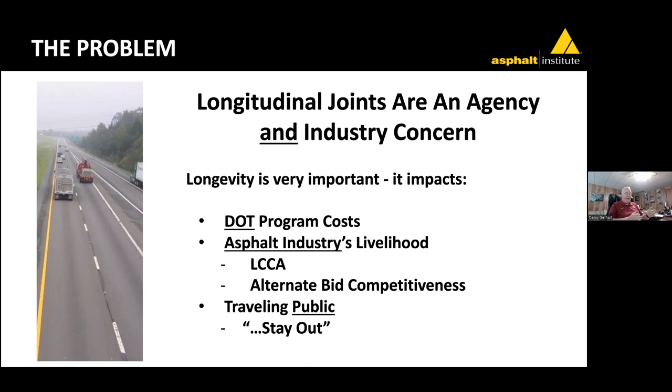Of course, the asphalt industry, it's their livelihood. There's a lot of push around the country about life cycle cost analysis. And if my entire roadway is very capable of lasting 20 years, but my poor joint cuts that in half or more, now that's really going to affect my alternate bid competitiveness. So I think it's in everybody's interest to build good longitudinal joints.

Well, we're going to use some terms this afternoon that we kind of want to get a handle on. I want to make it known that I don't always use exactly the precise term. A lot of times when myself or somebody else in the industry uses the word density, which is really a weight per unit volume, we really intend to be referencing the percent relative compaction. So I might say 94% density, and when I say that, I mean 94% of the maximum theoretical density.

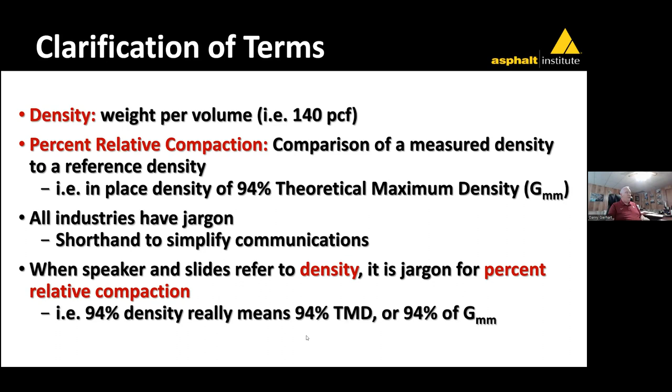So just be aware that I'll be using the term density consistently, but a lot of times I'm going to mean percentage of maximum theoretical. So just so happens the very next slide, though, this density actually means density.

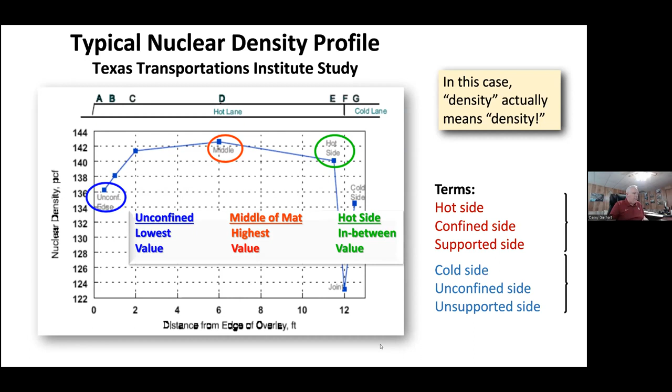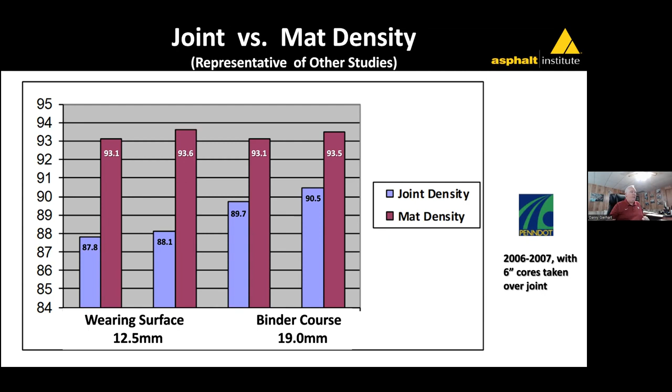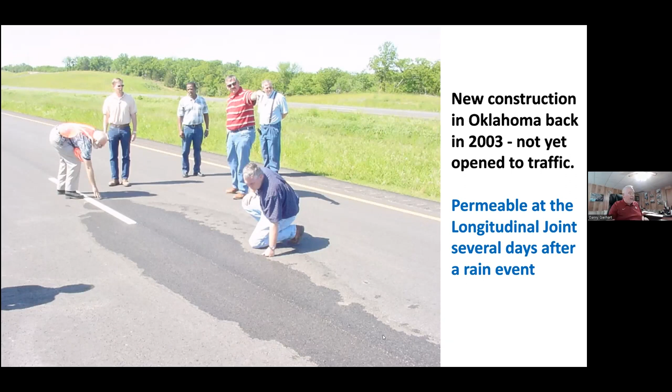This was a picture on a brand new pavement, never open to traffic, and I got called out there because after a rain, you could see that at the joint there was a lot of moisture that hung on for days and days. The issue was that it was very permeable there, because there was low density. So the first thing I asked to do was to see the records of the densities, and station after station I'm seeing 93, 94% density, but that's out in the center of the mat, not at the joint. I'm going to show you later the densities of the cores we cut right next to that joint - pretty shocking. It doesn't even have to be a pavement that's aged a decade to have a failing joint. This one's never been open to traffic and already having some joint issues.

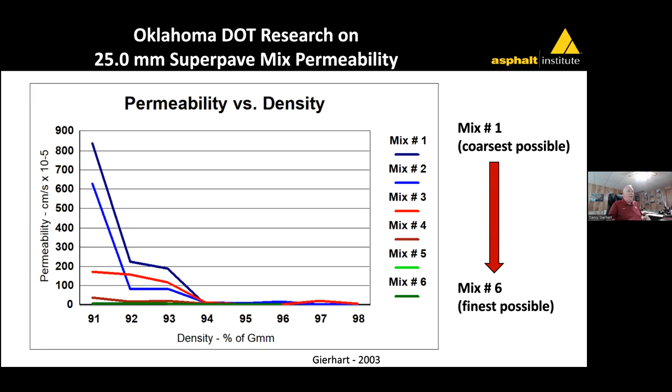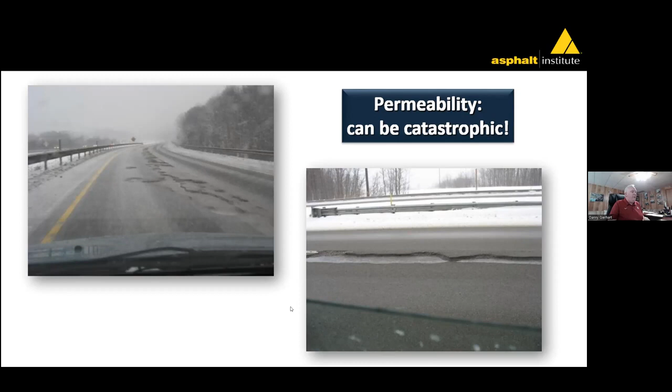So what affects the quality of this longitudinal joint density? What's going to lead or facilitate longitudinal joint problems? Well, it's the way the asphalt specifications are written, the way the asphalt is placed, and the way the asphalt is compacted. So this is both an agency, a contractor, and an inspection issue - everybody's got a part to play in making a good longitudinal joint.

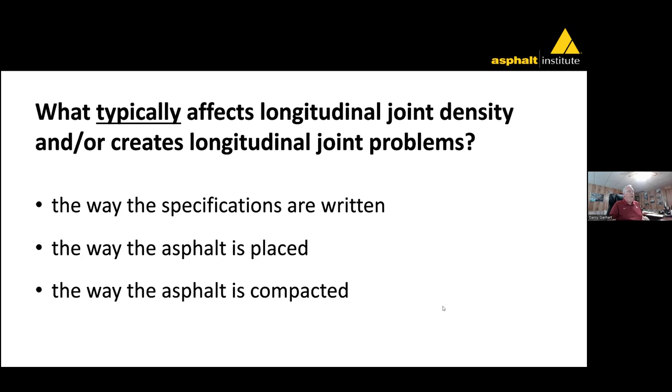So let's talk about the specifications. One of the things I think is really important to good longitudinal joints is a longitudinal joint specification. I really agree with this statement: if you can't measure it, you can't manage it. So we want to have some way to measure that longitudinal joint and compare it against some desired specification so that we can manage the quality of that joint. Otherwise, it will not be paid attention to.

So here in the upper box, what happens if we don't have a longitudinal joint specification? Well, there's high agency risk of joint failure, and the issues that go along with joint failures - those are both safety issues and budget issues for repairs. If there's no spec, there is no incentive for quality. Now that doesn't mean - we've got great contractors in Oklahoma - that doesn't mean they're going to try to do a bad job.

It's just that they don't have any financial incentive to make the best possible joint that they can make. And remember, we're in the low bid system, so a lot of times even the best intentions can't necessarily follow through because we have to compete against other contractors. If we can't get a job, it makes it very difficult to stay alive.

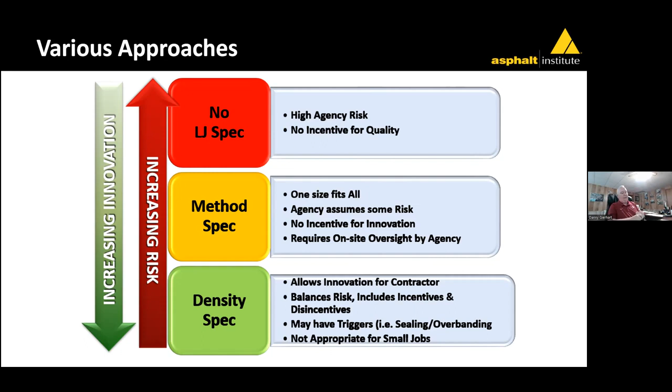We want to pay attention to our city friends that might be using DOT specifications. When we have these high density joint density specifications, those types of specifications aren't really appropriate for neighborhood cul-de-sacs, places where you can't get a nice paving train or compaction train in there to do the work. So it's going to require some judgment to decide where a density spec like what we're talking about is appropriate to be used.

I'm going to see if I can minimize this as well. Pardon me.

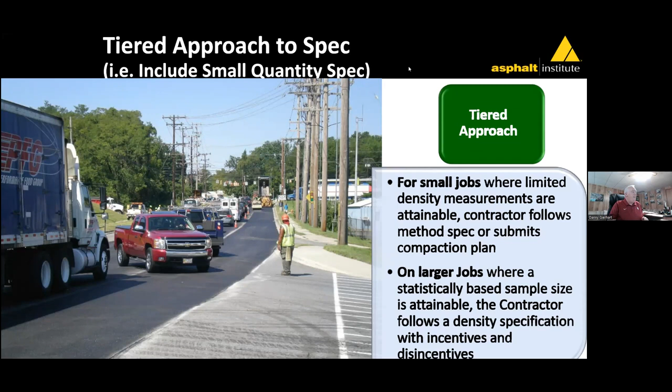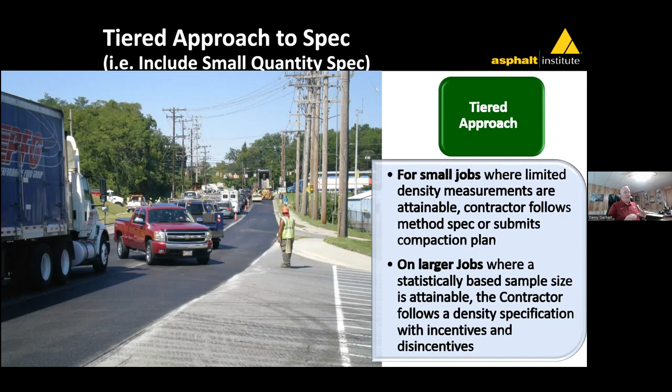We might have some tiered specification. For small jobs, maybe the contractor just follows a method spec or submits some type of a compaction plan that has to be approved - that might be more appropriate for city, county type jobs. And then for a larger interstate job, a state highway system job, or even a very large city collector where you could get statistically based samples, then the contractor would follow this density specification with incentives and disincentives.

Okay. Pardon me, but I'll make sure what slide I'm on. The controls are hiding my titles.

So, joint performance versus joint density. Stacy Williams over at the University of Arkansas has done some research, and their research indicated that when they noticed in the field that they had good joint performance, the joint density was within 97% of the mat density. When they had fair joint performance, the joint density was 93 to 97% of the mat density - and I'm not talking 97% density or 93 to 97% density, that's a percentage of the mat density. Poor joint performance was when the joint density was less than 93% of the mat density.

We have some more research done by Dennis Morian over in Nevada, where they basically had two categories: significantly better joint performance, 12 years or more, when the joint density was 98% of the mat density, and then they tended to get 8 years or less in service quality when the joint density was 95% or less of the mat. So in general, when we're talking about these, I gave those numbers as percentages of the mat density. Let's translate that into percent of GMM.

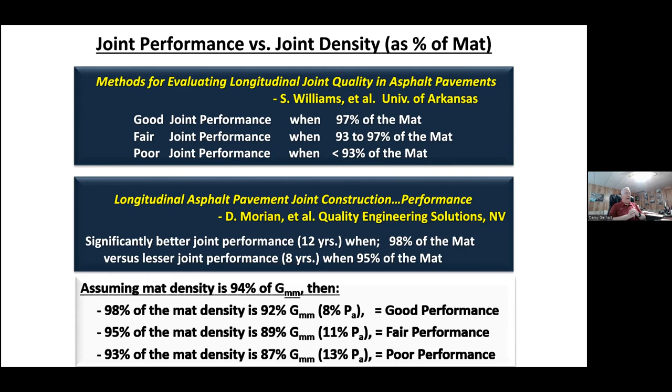We would typically see good performance where we would have 92% or more joint density, 8% air voids or less. We would see fair performance when we're in the range of about 89% of GMM, 89% of the theoretical maximum density, and then poor performance where we're down to 87% density or less.

Asphalt Institute's suggestion for a density spec is to cut cores directly over the visible joint for a butt joint, or in the middle of the wedge for a wedge joint, giving a 50-50 split of material. You'd average the GMM for both lots. The criteria would be greater than or equal to 92% of GMM for the joint density.

That's where the contractor would earn the maximum bonus. Between 90 and 92%, they would get 100% pay basically at 90, and then a prorated bonus as they approach 92. But if they were in that range, maybe they would need to overband the joints or surface seal the joints to prevent moisture from getting into the pavement.

And if there was less than 90% density, you would earn reduced payment, and then you'd be required to overband or surface seal the joint. The note to the right there is, again, this would be appropriate for highway work, large volume roadways.

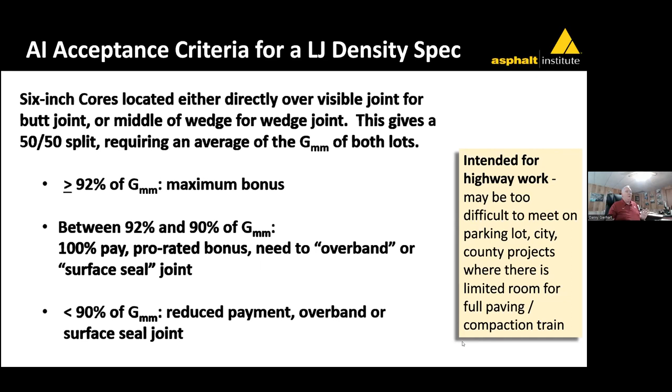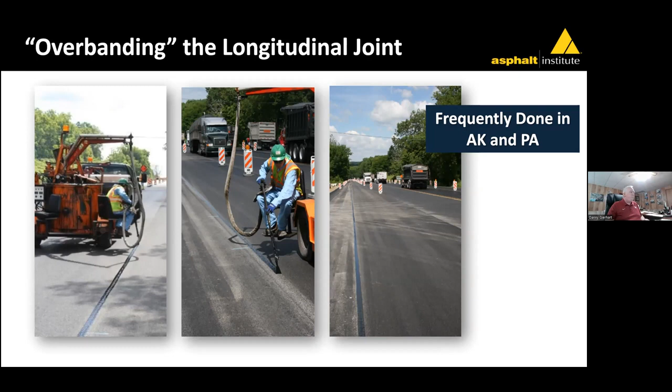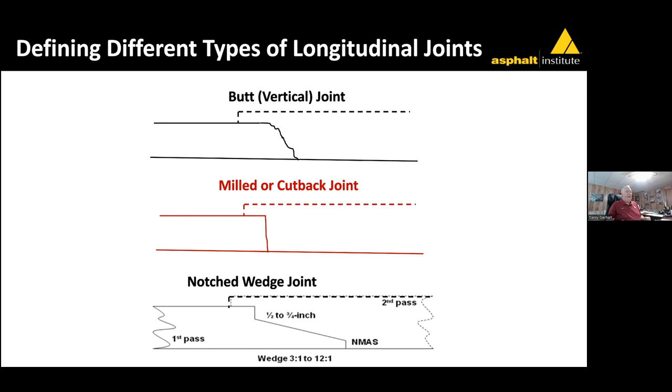But those notches are what allows that confinement and to get good density there. And that wedge can be anywhere from a 3-to-1 or a 12-to-1 slope, depending on the thickness of the mat and the template that's used on the paver.

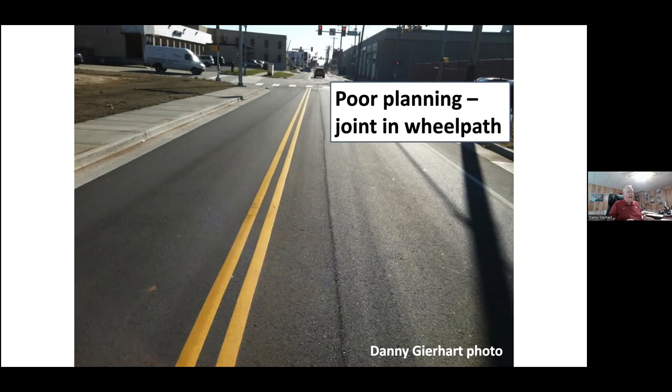And why the joint is there, as you'll notice on the right side of the screen, there's a bike path. So the yellow lane markings got shifted over the same distance as that bike path on the right, which caused the longitudinal joint to be right in the wheel path. You could imagine how easily a specification detail or a pre-work conference could have solved this issue to avoid having a joint right at the wheel path.

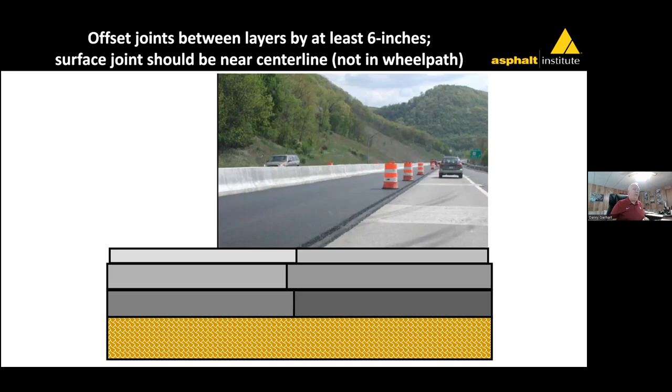Another thing we typically do, and we have a specification for this in Oklahoma specs, and a lot of states have this requirement, is when we have multiple lifts, that longitudinal joint needs to be offset, maybe 6 inches, 8 inches, I think I've seen up to a foot, with the idea that the top joint would wind up close to the center line of the pavement. So that's drawn out on the plans to make sure you don't get a joint in the wheel path.

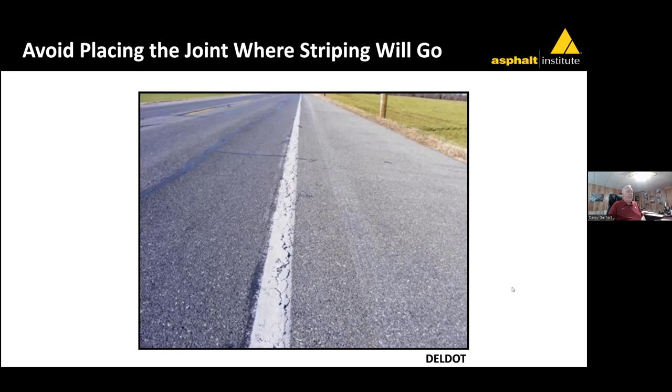We also would like to avoid having those joints right where the striping goes. This doesn't look too bad right now with the stripe there, but if that joint opens up and needs to be sealed, now at night it's going to be really hard to see that joint. If that joint had been offset a little bit from the paving stripe, we could have maintained safe painting on the roadway and given good visibility at night.

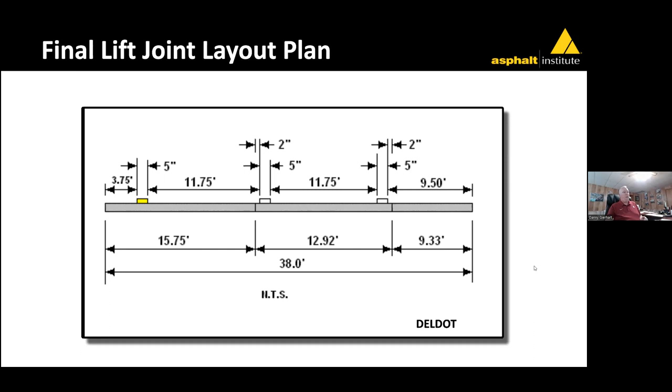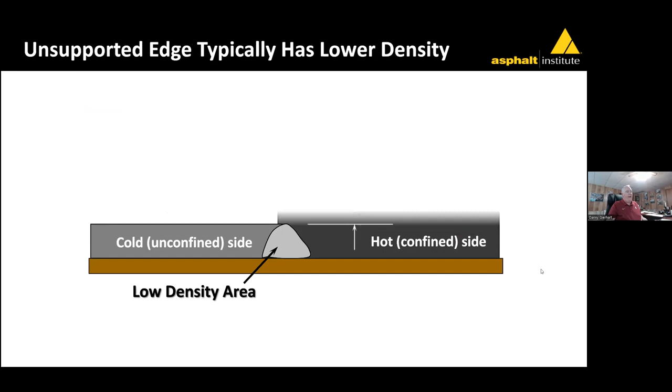So let's talk about the placement of that joint. On the initial mat, the first mat, we're going to wind up with an unsupported, unconfined edge on both sides of the mat, and we're going to have a really low density area there. But when we come back with the second mat, we're going to be confined, and we want to overlap that mat. Anytime we do, we've got to have sufficient material for roll down - that's going to be really important, as we'll see later in the compaction process.

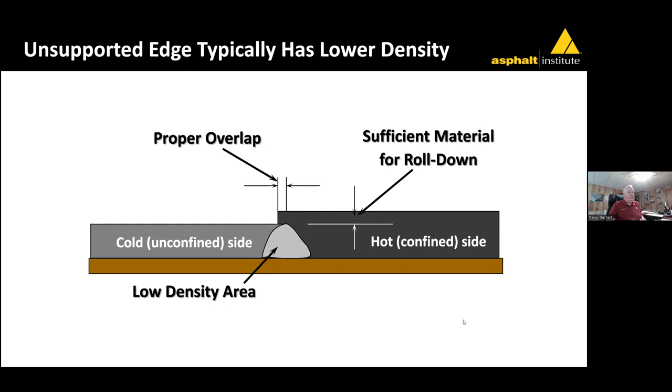We don't want to starve the joint of material at that important juncture, because when we compact the second mat, we could bridge that area right at the longitudinal joint, where one edge of the roller would be on that cold, unconfined side, and the other edge would be out, the drum width away from that. If there's not enough material right there at the joint, you wouldn't get any compaction at all. So we want plenty of material right there, and we also want this overlap. We'll see some pictures of that coming up.

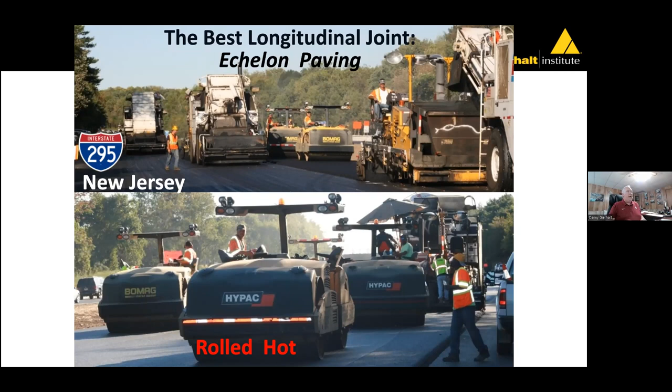If I had my choice, I would do echelon paving every time, because when I put two hot mats together and then roll that, you will not be able to tell there's a joint there. You're going to get great density - the density at the joint is going to be every bit as good as the density anywhere on the mat. So in an ideal situation, I would be doing echelon paving. Problem is, I'm not always in an ideal situation.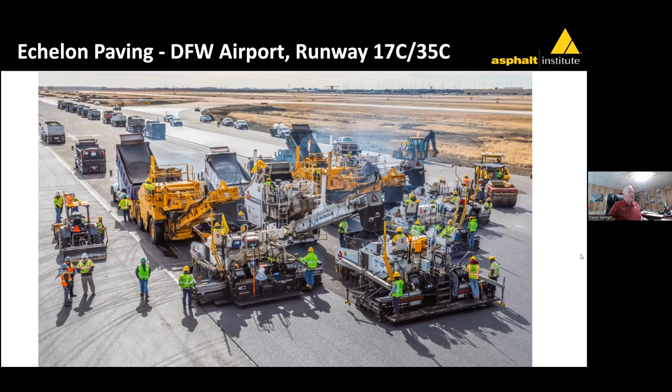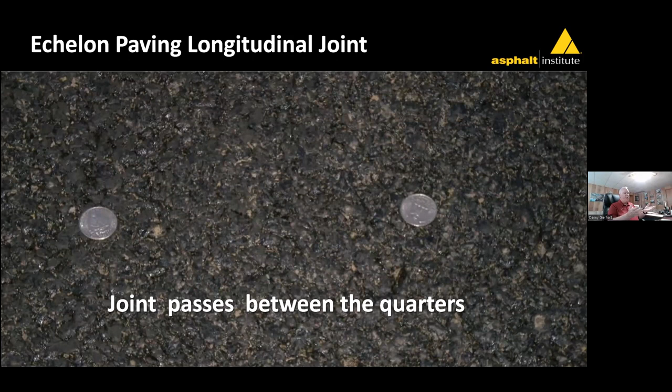Here's a picture - it looks like kind of a fake setup picture, but there is a joint there in between those quarters. You just cannot see where that joint is because both mats were hot and then rolled.

The problem is that we have traffic and we can't always reroute it to a different set of roadways and completely close down the road. A lot of times we have to maintain traffic through the job, and therefore we cannot pave in echelon. I would suggest, however, that there are times where we could pave in echelon and we just don't think about it. Maybe on the agency side, if we know we're planning on rerouting traffic and we'll have that road to ourselves for a little bit, it might be a requirement to echelon pave if it could be echelon paved. I think we'd get a lot better joints.

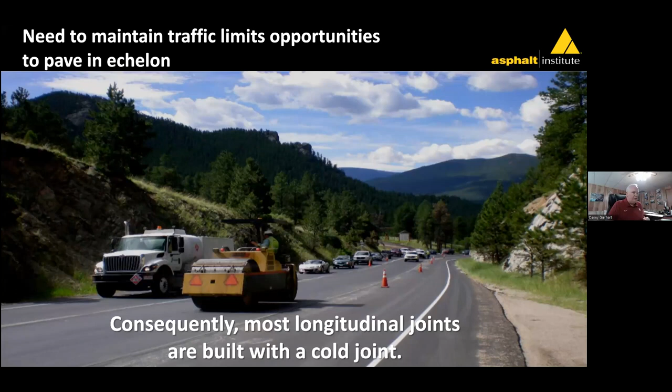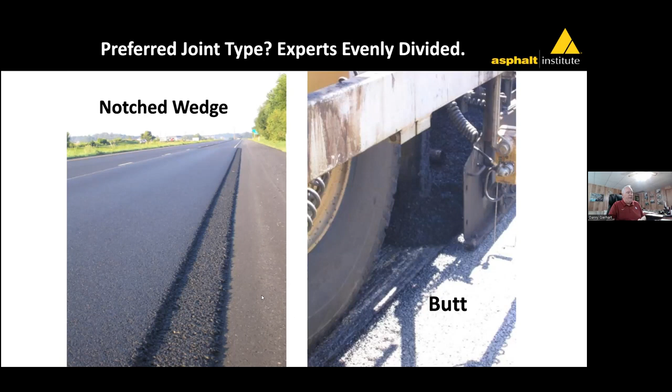Here's a couple of pictures of the notched wedge joint and the butt joint. We saw the stylized drawings earlier, but here is the notched wedge and the butt, where the end gate is down and the material goes right up against that end gate, and then we have a template that forms this notched wedge.

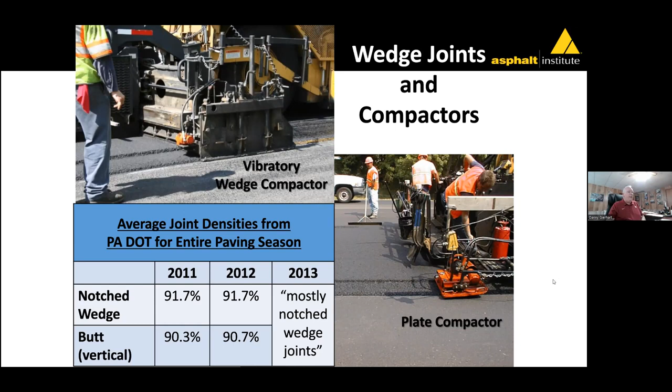I had heard that even some contractors that went to the notched wedge, for whatever reason, switched back to the butt joint. So I don't think it's a clear message that the notched wedge is always better, but at least for a while in Pennsylvania they seemed to get better results.

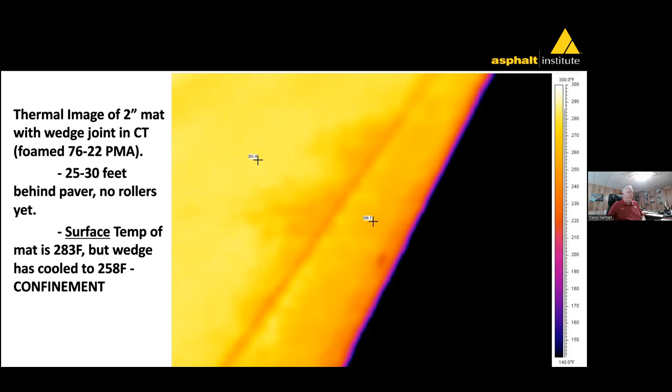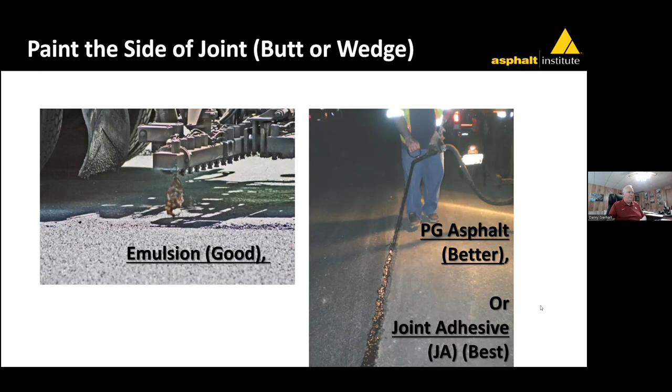In recent years in Illinois, they've had what they call a VRAM, generic name, J-band for the brand name, a binder strip placed down before the mat, and then that binder material wicks up through the joint and provides really good resistance to permeability. So there's all kinds of things you could do to prevent permeability.

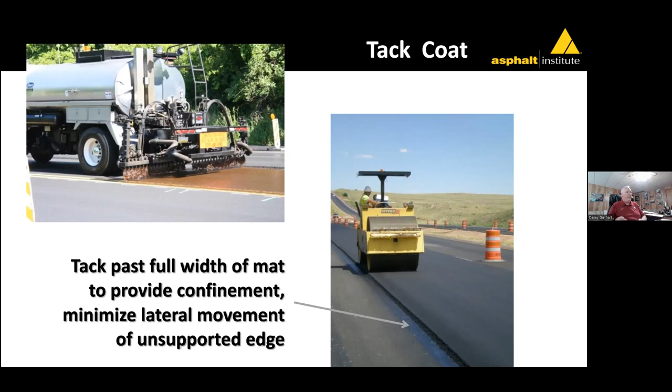Another best practice we recommend is when you tack that roadway, make sure it's tacked wider than the width of the mat you're going to place—there's hot material right there on the unsupported edge. If you've been out on a roadway, you've probably sometimes seen that edge kind of creep out a little bit. If we had some tack coat there, that would provide additional confinement to help that unsupported edge keep from having that lateral movement you sometimes see.

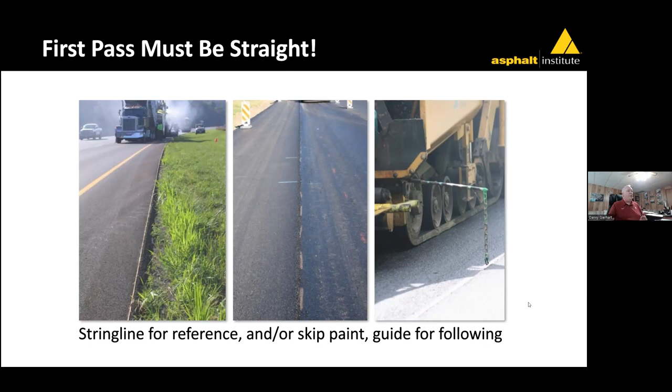Of course, we want to drive straight—that's a really critical thing to build a good quality longitudinal joint. You can see on the left a string line reference to drive straight. A lot of contractors use skip paint. Maybe if I'm placing a second mat or I'm in a curb and gutter section, I might have a little device with a chain reference like that—something for that paver operator to drive a straight line so we can come back and match that joint. This shows great results. We already saw the string line; this is the same job with the string line, and we have a really nice straight edge.

What I don't think is so great is I don't see any evidence of the tack coat extending out past the edge of the mat. So we're not getting any confinement that way, but at least it's a straight line paving, and it's going to be easy to come back and not just match, but also overlap consistently.

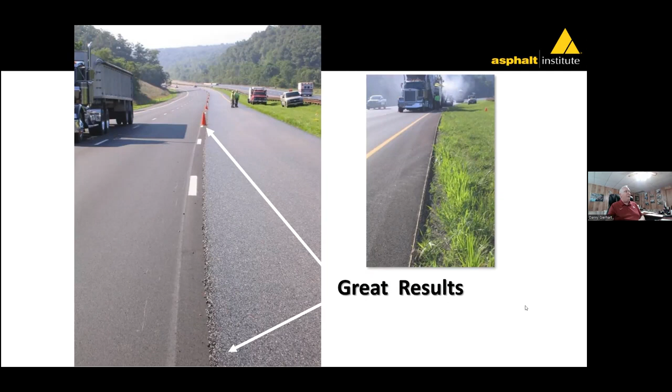Here you can see a curb and gutter section using the chain as a reference, and you can see the paver operator looking here on the picture on the right, down the edge of the paver to that chain to make sure that he steers straight.

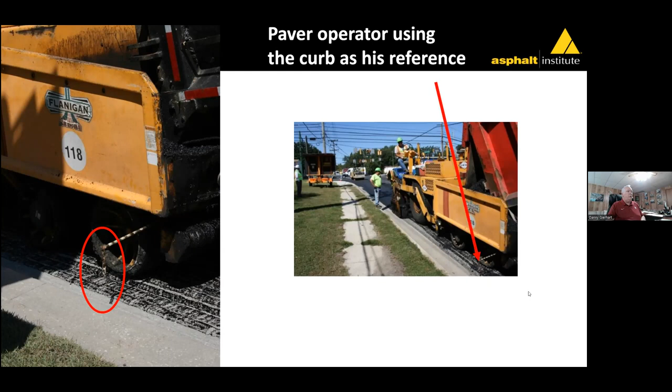So if you have a situation like this where we have not a straight edge, it's going to be very, very difficult to come back and place another mat right up against that. My joints are just about guaranteed to be poor quality.

So you may have heard me say this before. We were giving this presentation in another state, talking poorly about this picture on the right and how poor of a job it was. And a guy came up to us afterwards and said, 'That's my job.' You got to be careful not to badmouth the work too much. He knew it was a bad job. He wasn't upset, but he just wanted to let us know that was his job, and that he wasn't happy about it either. I love the sign there, uneven pavement, definitely uneven.

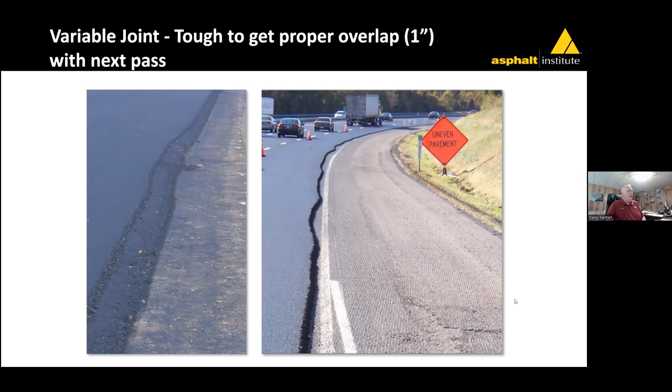So what we would like to see is this 1-inch overlap, unless I am on an airfield where I might want to only have that overlap at a 1/2 inch. And why do we say that? Well, we'll see a picture coming up soon that makes that clear, but we're going to get better density with this overlap than if we try to just match up the second mat with the first.

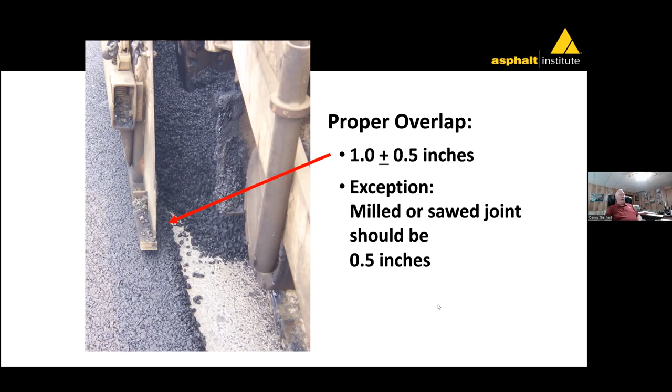I call that the pretty joint if I don't have any overlap, and it looks really nice on day one, it's nice and black, but very soon that joint is going to open up and start to receive water, and then it's going to deteriorate quickly. If I have the overlap, it's not going to be pretty. In fact, unless you train your inspectors, when they come and compact this overlapped mat, there's going to be about a 1-inch wide strip of crushed aggregate there that may make it seem like there's a problem. But that crushed aggregate on the overlap part is just going to slough off, and we're really going to wind up with a much better density on the second mat.

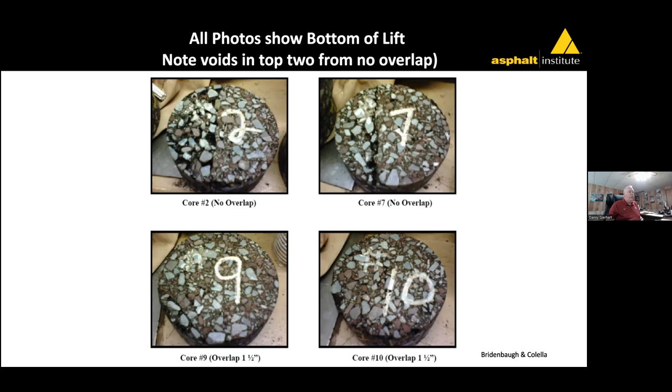So why do we say this? Well, these are pictures from Pennsylvania DOT with cores cut right over the joint. The top two pictures are what I call the pretty joint, where there was no overlap. They just tried to match perfectly, and it looks great on top. But when you turn it upside down, you can see very poor density there at the bottom, whereas the ones where we had the overlap, you can see just obviously, without even measuring, much better density. So I'm a big believer in the overlap, and we will have this crushed aggregate strip, but it's going to be small. I'm going to trade a little bit of aesthetics for better performance, and I'd certainly be willing to do that.

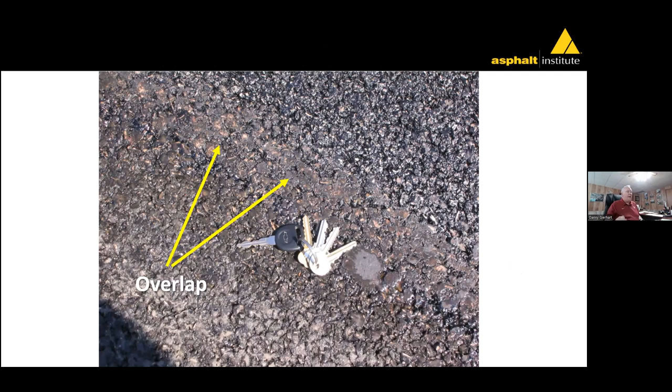I'd like that end gate to be placed flat on the existing surface and the material flowing right up against that end gate. A lot of times you'll see that end gate riding up on top of the mat to be placed, and then that just lets the material flow under the end gate and gives me more of that uncompacted low density material that I don't want.

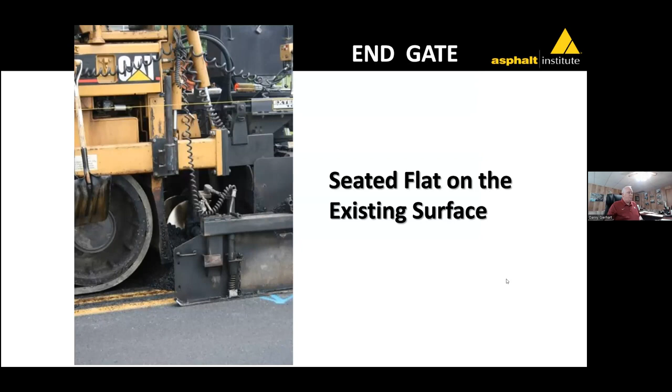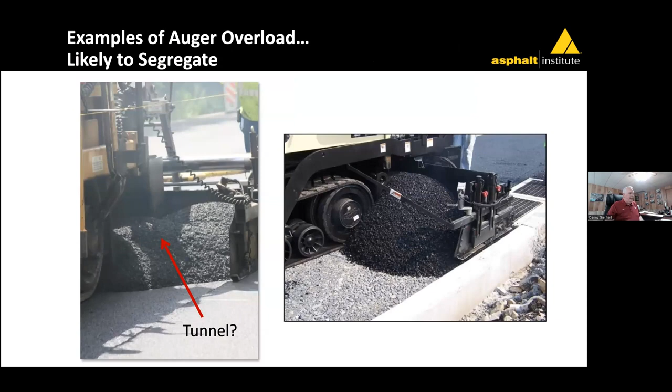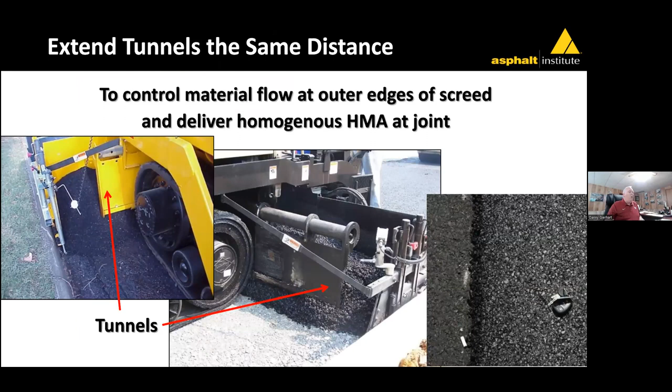Sometimes you'll see a paver going down the roadway with just a bunch of material rolling out by the end gate. So we suggest having a confinement tunnel with those to let that material move out to the end gate and not just roll and segregate out there on the edges. We think this is maybe a result of when you get these big masses out there by the end gate that just roll along, giving kind of a segregated looking mat.

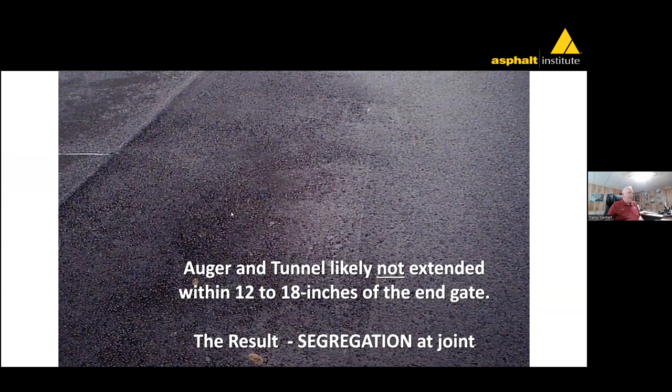We said that we want that second mat to be at least 1/10 of an inch higher versus the cold side. New Hampshire has it in their specifications: it's got to be at least 1/8 of an inch higher.

The deal is that if that mat is starved in that location, the roller drum's going to bridge onto the cold mat, and then we won't get any densification at that joint.

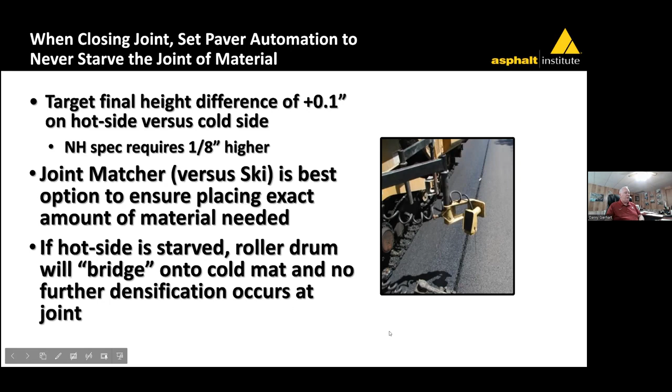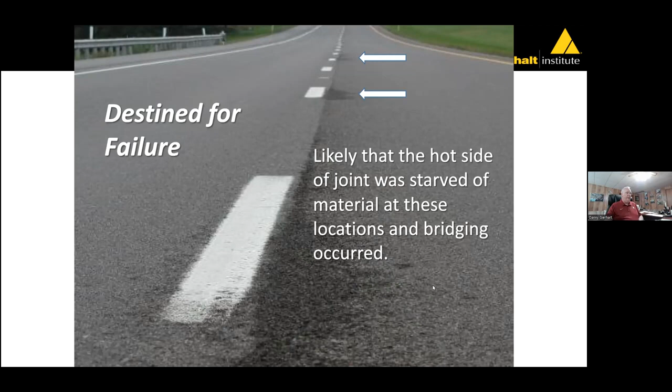I'm going to show you some kind of scary looking data when we had just that situation occur. It might have occurred here. We have a situation where this was on the left, maybe the first mat, and on the right maybe the mat that was butted up against it. We starved material, and it's after a rain, which is a great time to see segregation and low density issues. We've got that here at some places along the longitudinal joint, and we're going to have some problems there. That's a guarantee.

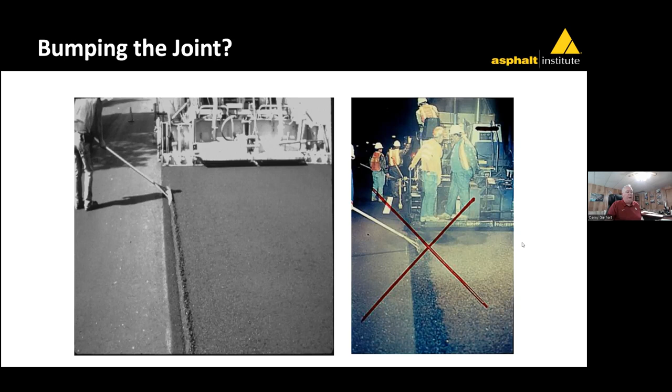And so you certainly don't want them slinging that material off across the mat. I know when I first started at the DOT, for some reason that really impressed me, that those lute operators really knew what they were doing, and they were just working hard, throwing material across the surface of the mat. Only in later years did I find out that's probably really not a good idea, and is going to wind up with a rough surface and poor joint density.

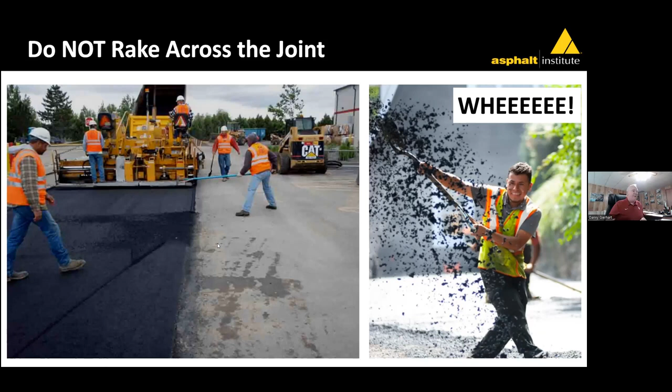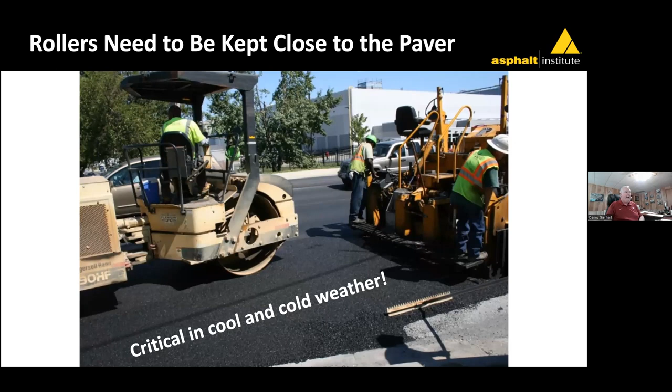Okay, let's talk about compaction. Of course, just for good compaction, we would like the roller drum to stay up close to the paver. Density is obtained when the mat is hot. And as far as on the joint, when we're on the unsupported side, we've got a couple of options, main options.

Option one is to let that roller overhang the edge 4 to 6 inches on the first pass. Option two is to bring that roller 4 to 6 inches from the inside of the edge, and then the second pass go over the edge. Option one, as long as that edge can support the roller without breaking down, I think that's probably the best option. The idea behind option two is that we would densify the mat and therefore provide a little bit of confinement and minimize lateral movement under the roller at the longitudinal joint.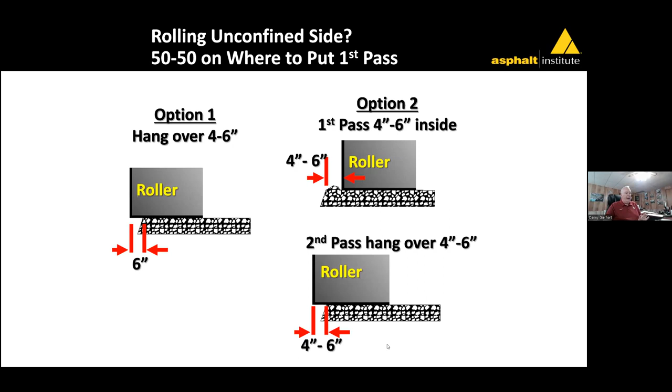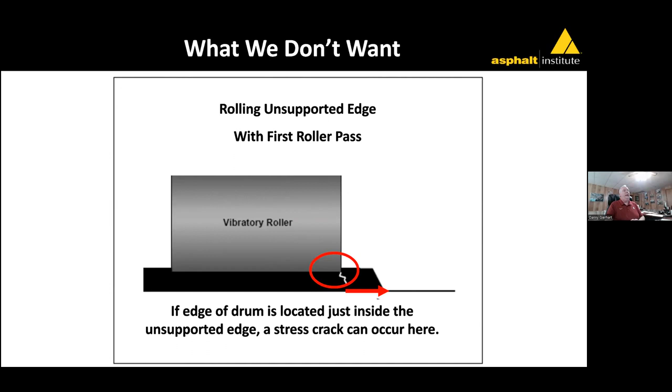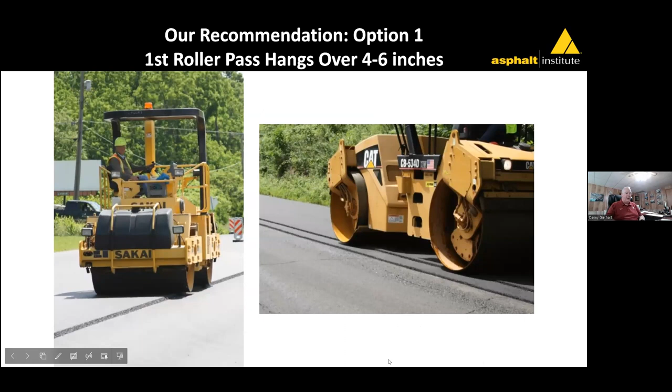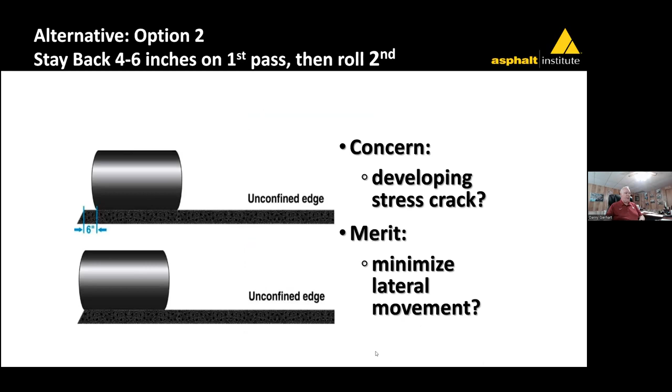I understand that. The issue we see sometimes is if we make that first pass inside 4 to 6 inches from the pavement edge, we might get a stress crack right there. It's sometimes not easy to see, and that might cause some long-term damage. So our recommendation at the Institute is to allow that first roller pass on the unsupported edge to hang over 4 to 6 inches, versus this option number two of staying back 4 to 6 inches and then rolling. We've already talked about this potential for stress crack, even though we might minimize the lateral movement.

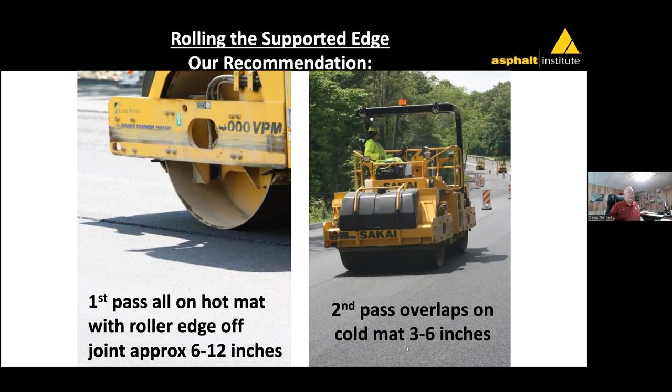Well, on the hot side, again, you've got a couple of options. Our recommendation is kind of the opposite of what it was for the unsupported edge. This one we would recommend coming in about some number of inches, 6 inches, 12 inches, maybe even up to that with the first pass. Then on the second pass, now we can use the full weight of that roller drum to drive this wedge of loose material between the cold side and this initially compacted hot side, and get a nice wedge of density right there at the joint, making sure on that second pass to overlap the cold mat at least 3 to 6 inches.

So if we just make our first pass with the edge of the roller on the cold side and the brunt of the roller on the hot side, if I starve material on the hot side right at the joint, you could see that I could just support the roller on the cold side and then lay out onto the hot side and not get any densification under most of the roller. That's a real problem.

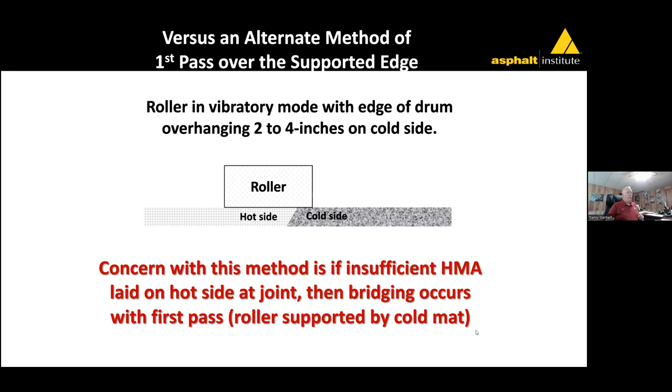One core, second lift on the base on the right, was at 93.4 at the joint - great number. But look at those numbers at the surface and intermediate layer on the left: 82.6, 83.3. That is very, very low.

It should come out from under the screed at that density or more. So I don't think we got any densification from the mat. I think we got that situation where the roller was supported on the cold side and we just starved material there at the joint and got no compaction, and we see these extremely low densities that will cause some real problems.

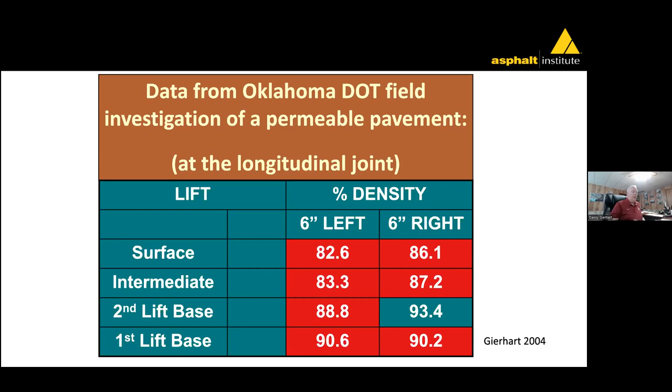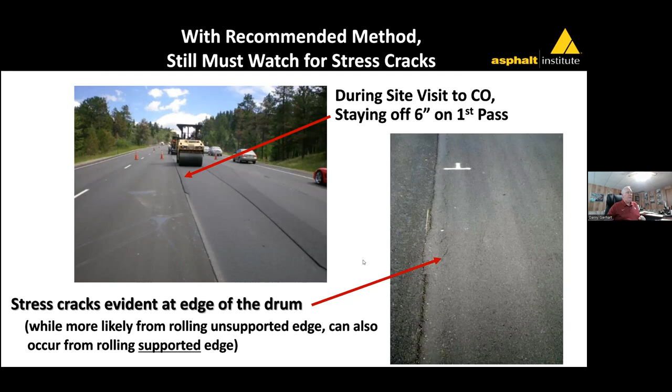Okay, so we want to watch out when we make that first pass still on the hot side. You can still see in the picture on the right evidence of some stress cracks, so keep an eye out for that. If you have those, then I would go with the other option. But that being said, there's not just one prescriptive way to roll the longitudinal joint. You have to look at it, realize there's pros and cons, and make your best judgment for the project.

Okay, about done here. Other options you might have: if I want two supported edges and no unsupported edges, I might mill and fill - that's what this mill and pave one lane at a time is. I mill out one lane, come back, and now I've got supported edges on either side, which tends to get better joint density versus having an unsupported edge.

The cut back joint - that's again what they do on airfields, both FAA and military Department of Defense airfields. Some places have used joint heaters; the original joint heaters, I don't know, were very effective, but I think the newer joint heaters can heat up that cold mat you're placing against and give you a much better joint. So joint heaters are not for the unsupported side, they're for the supported side.

Joint adhesives - again, those might improve the impermeability that we want at the longitudinal joint. So hot rubberized asphalt, the VRAM, things like that would help that. They won't really change the density, but the permeability is a significant issue.

There are some states like Tennessee that put like the equivalent of a Thompson's water seal for a wood deck - they spray some type of sealer right over the joint, and it kind of sheds the water. I believe in Tennessee they do that pretty much as a matter of course over certain types of roadways.

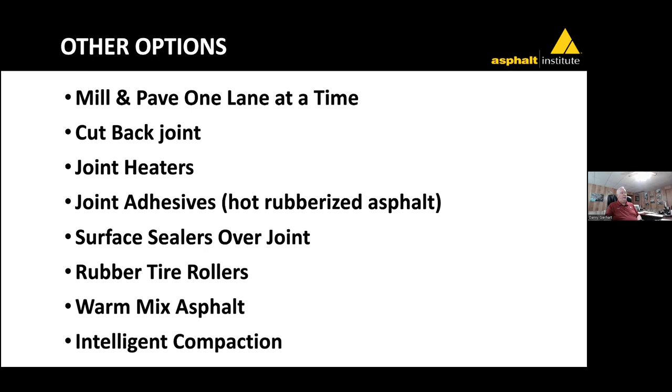Certainly intelligent compaction has come a long way over the last several years, and there's a lot to be said for that type of technology.

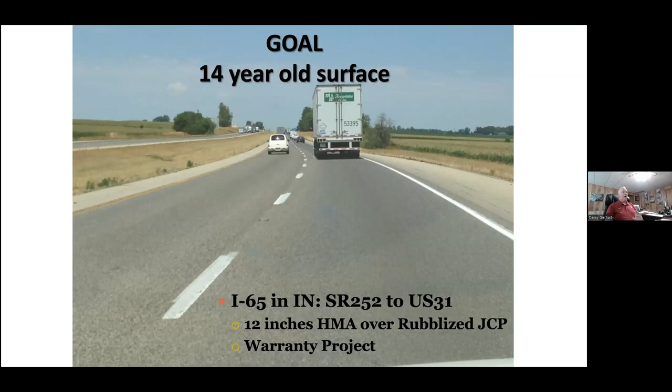So this is what we want. Last slide - this is, I can't remember how, a 14-year-old project in Indiana. I-65, 12 inches of hot mix asphalt over rubblized jointed concrete pavement. It's a warranty project. 14 years old, that joint still looks great. The mat looks great. That's what we want to build all the time, and I think that we can do that.